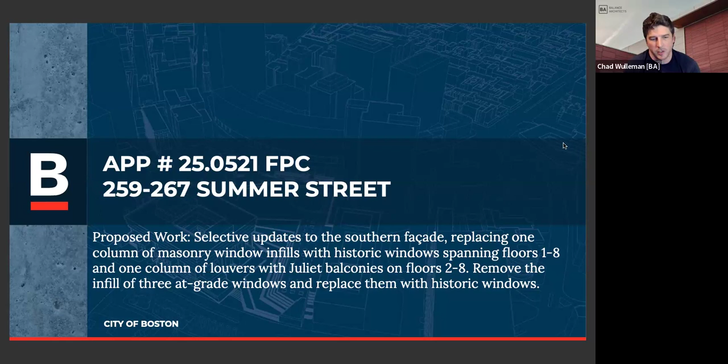Hi, commissioners. Chad Wulleman from Balance Architects. I'm going to run you briefly through the project for 259 to 267 Summer Street. This is part of the new downtown residential conversion incentive program. There's board approval as of December 12th, 2024. We've made a lot of efforts to minimize anything on the exterior of the building, with a few exceptions we'll get into as we go through the slides.

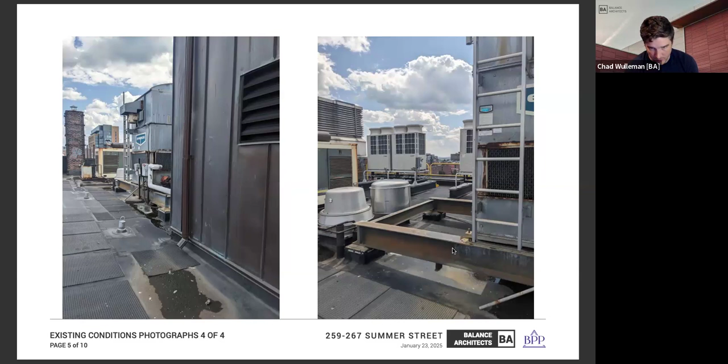Here are some images from the roof. These are important: you've got the existing head house on the right, and some mechanical equipment behind it. The new mechanical equipment will be going in the same place, so again we're trying to minimize any impact there. We've already gone through the process of mock-ups on the roof to ensure those aren't visible.

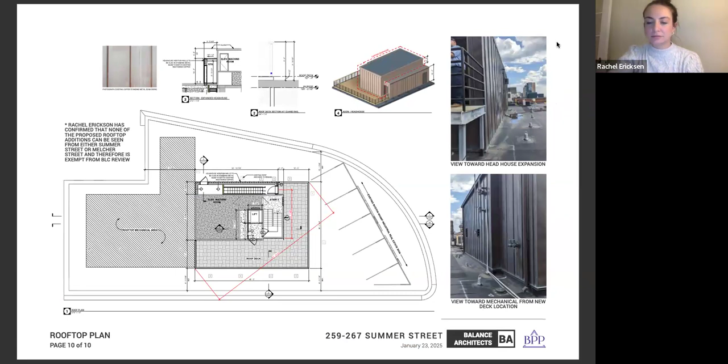David, you're muted. On your roof work here, where you're adding a new deck surface, is that it? Is there going to be a railing? And then I assume Rachel, you looked at that as well? Yes, they mocked up the rail. I could not see the rail at height.

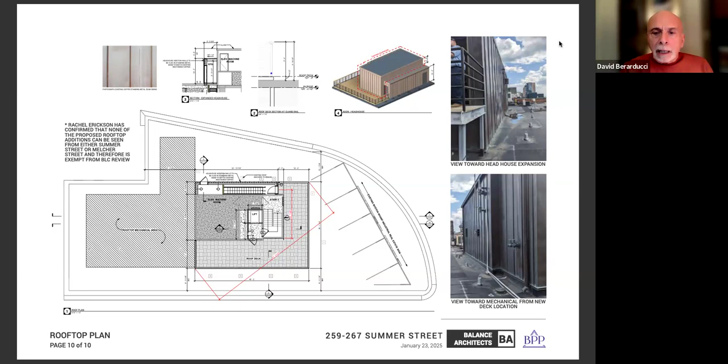All right, so if we can go back then to the beginning, and see your first alterations here. Basically it's a restoration of what was there.

You're not proposing any new openings that were historically not there. The window row to the left that's highlighted there, those are going to be brand new windows. And then what is there now? Were they bricked in, or was it just a solid pane of glass?

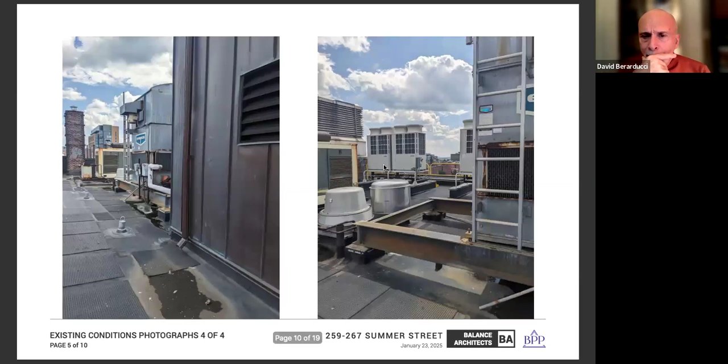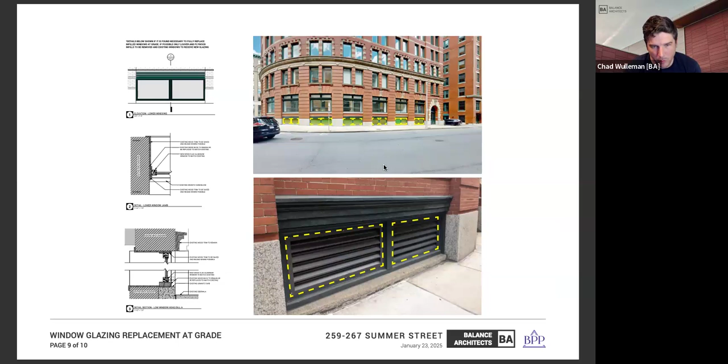So there's a slide that actually shows it here, it's going to be later, I think slide 6 or 7, maybe 8. And I'm wrong again, it's 9. Yeah, here we go, this is that bottom row window. So 3 of them are infilled with louvers like this, and 3 of them have plywood panels that are painted. All right, so I'm talking about that long vertical row of windows.

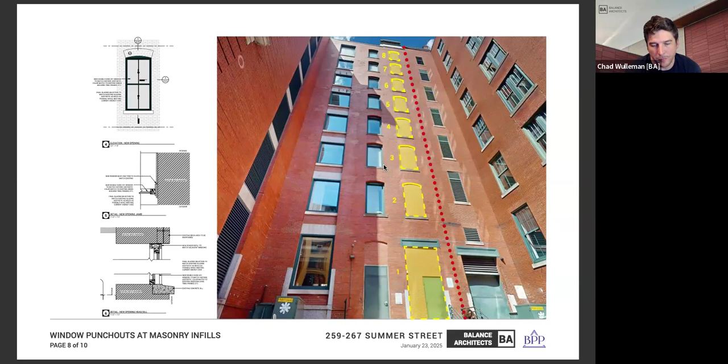Yeah, I apologize. Okay, so this is brick infill now. Yep. But on the other view that I was looking at, was this it? Okay, oh geez, I don't know, I'm getting all disoriented here with the angles. Okay, so this view, I understand where the right-hand segment of the building is, that vertical, and then moving to the left, there's a space, and then that row of windows there.

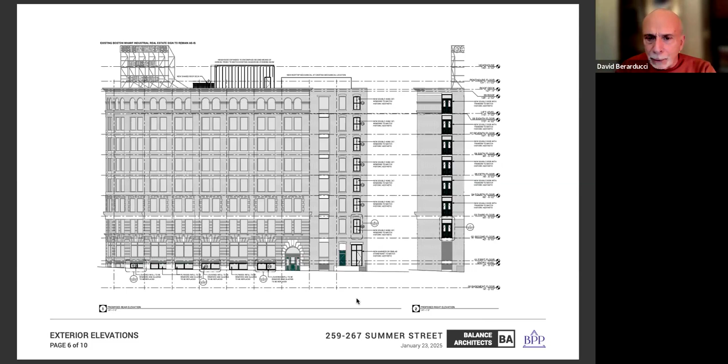Yes, those are going to be new. No, so these are actually these ones. So on the left elevation, the proposed rear elevation, the ones to the far right of that specific elevation are actually the ones filled in with brick and they're being punched out. All right, so that's set back, in other words. Okay, yep, that's where I'm getting a little bit disoriented here.

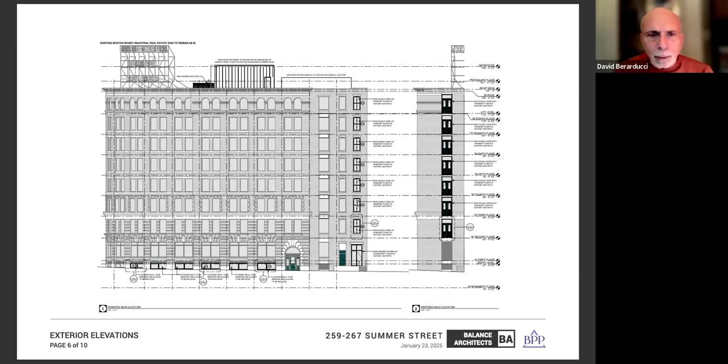Okay, so you're taking the brick out and putting in the 2/2. I assume historically that's what was here, since this building has been stripped of all its original details. Actually the image I have of the existing building is from 1907. I should have touched on it when we showed that image. So on the far right of that image, you can actually see -- oh yeah, I see it, I see it -- two over two. And we also looked at the plans for the building, and they had 2/2 windows in the original plans.

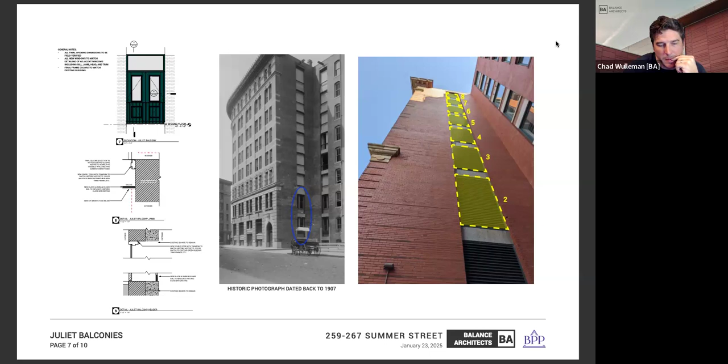All right, let's keep on this slide because I'm going to ask about this. So these windows are going to be metal clad. We're working with Pella right now. These are either going to be metal or wood clad, I believe. All right, yeah, okay, well I guess we would want to know that at some point. So I guess we'll probably ask that detail be remanded to staff, but as a proviso.

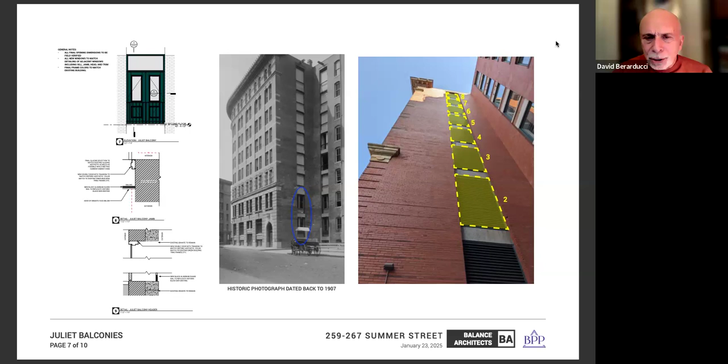Now in this view, what you're showing in yellow is what's shown in the historic photo to the left. So what is there now? In the historic photo, what are those light grayish covers on the opening? This was a hoistway originally, right? Yes, it was, you could see the hoist. You'll see you can actually see it on the right side here too, we have a similar thing happening next to it. As you go up, some of those panels actually open.

Okay, so these were like interior doors that opened in, and they all open in. Yep, that looks like it was just a pipe in the middle to prevent people from falling over, I'm gonna guess. Yeah, it actually looks almost exactly like a Juliet balcony on those first 2 floors. Yeah, right, higher up, it looks like a pipe just across to prevent a fall.

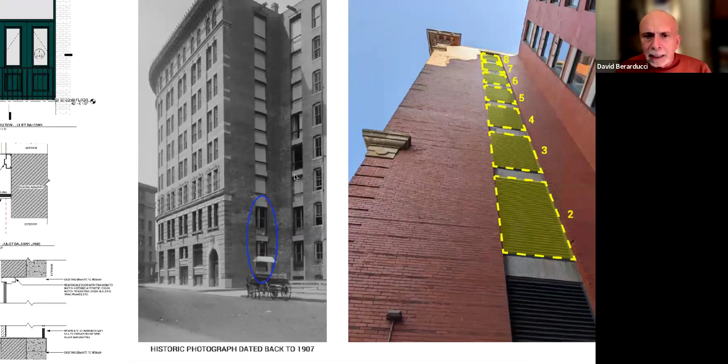All right, so pan to the right there so I can see what you're proposing. You show the one louver at the bottom that does not have a yellow screen over it. The reasoning for that is there's actually existing transformers outside of that area, so that louver will not be in yellow. That is the first floor, over on the left historic photo.

So you're leaving the louvers there and then going up to the second floor. You've got that blue ellipse showing both the first and second floor. So on the second floor, what are you proposing there? You're proposing double doors like you have here on the upper left, with a transom above. Did that historically have a transom? I don't really know, so there's two reasons for this.

One is we're trying to do something similar to what was there historically, but then at the same time we're trying to provide as much light as we can for those units inside.

So is that the top of the transom, is that going to be any taller than the top of the historic door? It shouldn't be. This should actually match. It's a little difficult to tell in the historic image, but basically that louver infill is exactly the height of that door up to that next band of concrete. So we're talking about putting it in the exact same location.

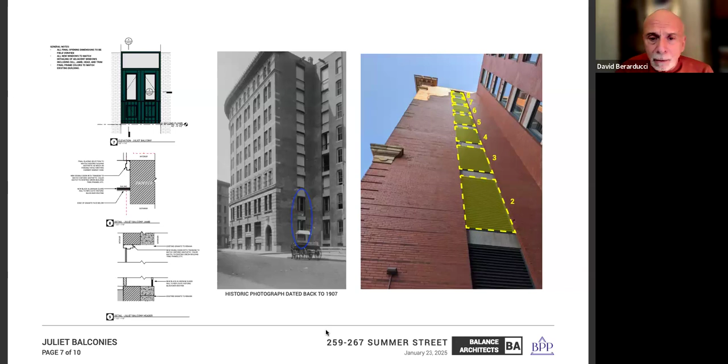Well, I guess I wouldn't look at it necessarily having to see what's nearby, because you've got the historic photo right here that shows you what it was. It wasn't necessarily a door to walk out and be used like a door, it was just... So I don't know why we wouldn't try. Ed, are you reading in that second floor, if you can zoom into the photograph with the blue circle?

Are you reading that as... I see, okay. So what you're depicting here is that there's a ledge, there's a grill, there is some material of opaque surface that is the bottom of that double doors. Is that how you're reading that? Not reading that as a full glazed panel from top to bottom, correct? Correct. It looks like there's a solid panel behind that guardrail there.

In the historic photo, yeah, she zoomed in a little. You can see it pretty good right there. So in the new door that you're going to propose, where is the bottom of your new door in this historic photo? Is it at the top of the grates or...

No, it's at the bottom. It's right at the bottom of the grate, basically at the cursor. This so I could... bottom of this door would have been, yeah.

Chad, I think you should be able to draw. Just, as long as I see your cursor, if you can just point, just because I want to make sure that we're doing this. This is my cursor, David. Oh, it is. Okay, there we go. Chad, can you draw? Okay, so that red, that would be the bottom of your new door. Yep, which is the bottom of the louver, based on the existing floor inside as well.

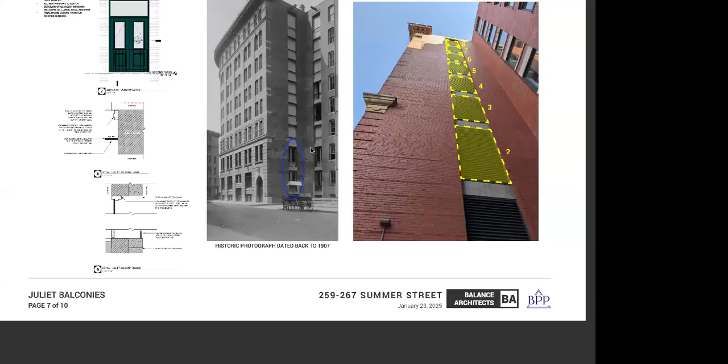Okay, because I don't know if this gets to what you're referring to - if there were just openings, why do we need the Juliet balconies all the way up the length of the building? That's kind of how I'm viewing it right now. If you just put windows in on those floors, the windows would be fine, but there's all the extra grill work and so forth all the way up the building.

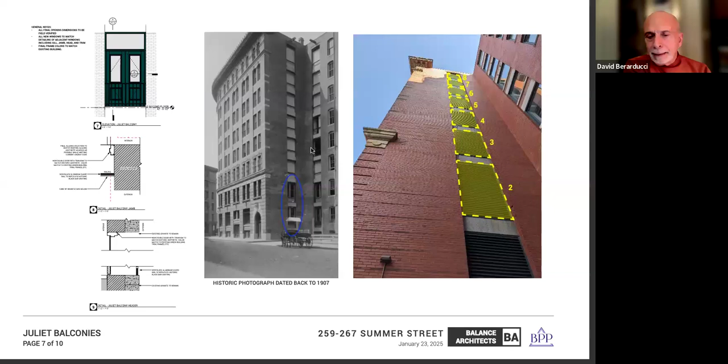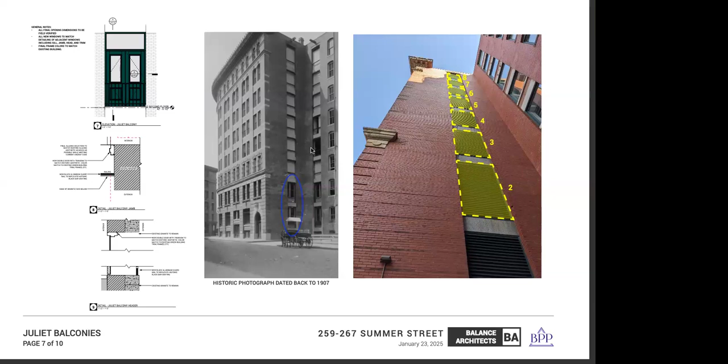I think the reason the grill work is on floors 1 and 2 is to show that the opening is as big, as tall as the openings on floors 3 through 8, but the window that was historically there is shorter than that. So the bottom portion, they wanted to express it, so they just put this grill there, or the metal grating, to block it and make it a little more visually interesting, and keep the same window opening consistent all the way up.

So all I'm getting at is, to me, it seems floors 1 and 2 ought to have windows instead of this door that you're showing, and then floors 3 through 8 - I guess that's the question. You could say, okay, you could put in those double doors, but I don't know that you would want them to open. So you're going to be adding a new feature to the building that was never there - these grates, the railings, I'll call them, from floors 3 through 8 that don't look like they were there historically.

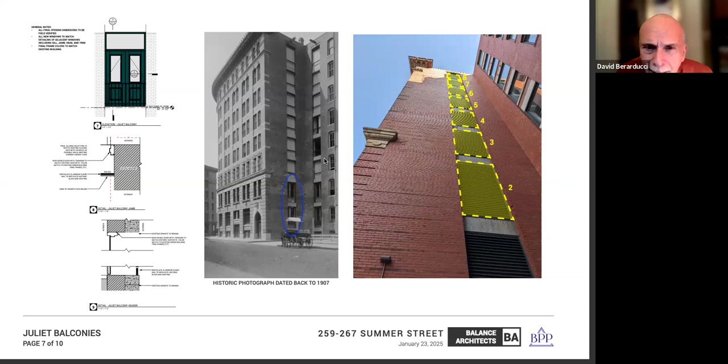As a matter of fact, you can see on the 90 degree turn of that facade, that one hoistway window or opening that is open, and it looks like the doors had been open on the inside. So the whole entire expression of that opening is now visible, with no railing there, just has one hefty bar, which I think was a safety thing back in those days - now of course it wouldn't pass code, but that's the visual I would rather see, rather than have those railings with the four inch on center.

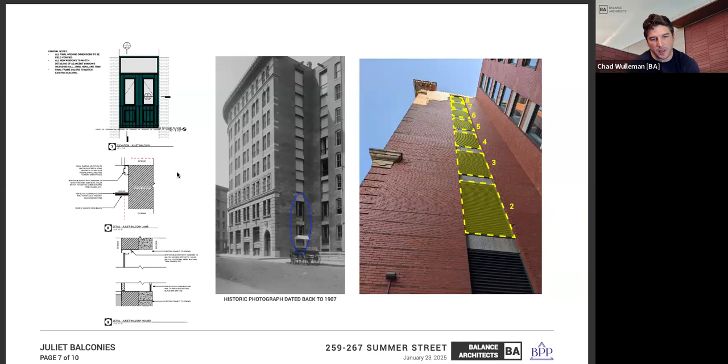But then now what I guess you're getting at is that you want those doors that you're showing to be operable, so you could open them up and have air come through. Is that what - yeah, it's a nice feature to be able to open those doors. I think the thought was, seeing those on the lower floors, that's what they felt like, and it felt like that would fit the aesthetic of what's happening there.

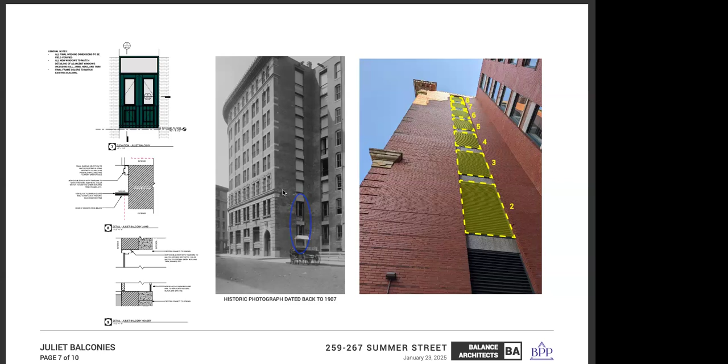Well, I think what Adam's suggesting is there would be some kind of a fill glass beneath that 4-inch diameter bar, to functionally create a Juliet balcony and have some activity in that area, without just slapping a grill on there, to emulate in a passive way the aesthetic that is closer aligned to the historic photo. Is that right, Adam? That's exactly correct, and what I was trying to articulate in not as great a way as you did.

I'll just say my own comment on this: I think that any of these configurations is an improvement from the existing condition today. I'm not sure that's the standard, but I think any activity in this building is going to be very exciting, period. It's great that it's more residential within the context of the neighborhood, and certainly seeing any kind of activation from this view corridor—the existing conditions photo on the right shows grills that are going to be inanimate no matter what. So I think just as a baseline, that's a great place to be operating from.

I do like the restrained, simplistic industrial look that David is pointing to in these upper floors. There's something about the plinth, the base condition of the second floor, that has characteristically a different quality than the upper floors. So the simplification of that, I think, is a good direction to be moving in.

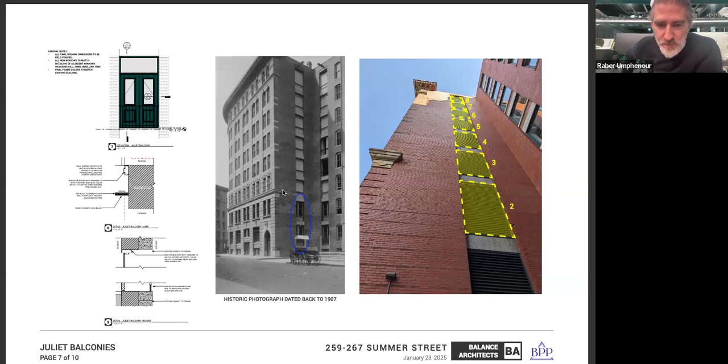As a general idea, I do take your point, Adam, that the bottom two floors are not really going to be an expression—you're going to have a standalone second floor condition because the first floor isn't being touched. Right, yes, that's true. But at least it sets up the possibility that at some other point in time, the first floor can emulate whatever is done on the second floor.

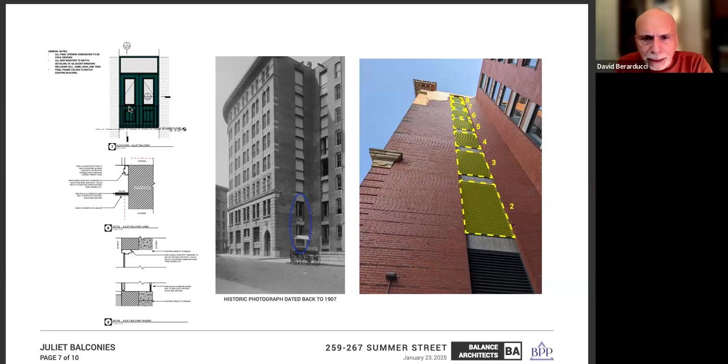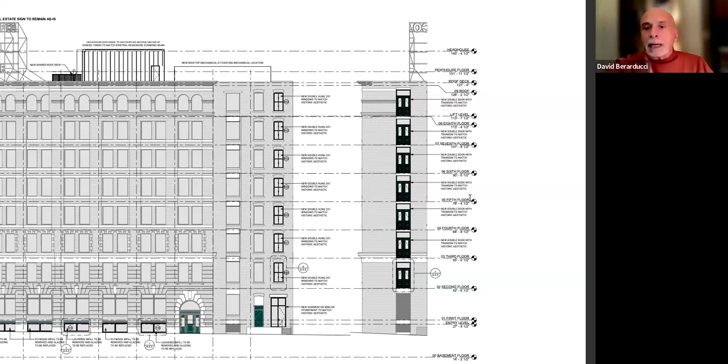It's nice what you're showing here, but it's not historically what was there. You're introducing a transom window, which is now putting a whole series of horizontal expressions all the way up, which wasn't there before, obviously. So I'm just trying to see, is there some way to get closer to what was there in terms of the physical opening, which looked to be a solid door with that big bar separating it at the one-third point of the opening.

I guess those doors, the original doors, were probably not glazed, it looks like. They were solid. Yeah, I think those are solid, some kind of metal or door.

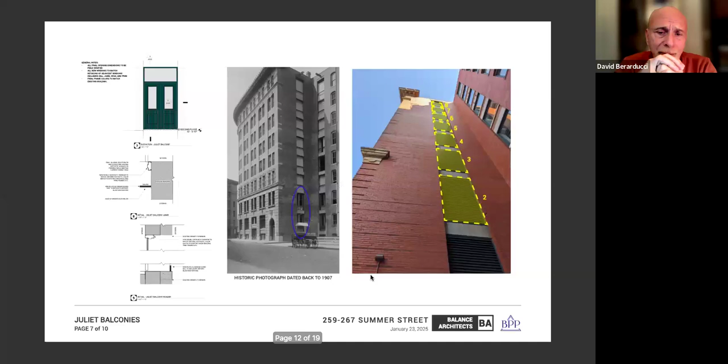So I'm not saying you do that, but I'm just trying to think if there's another thought here. If you were to do a window, first of all, let me back up. The opening we're looking at here on the left side, where the oval is, all the way up.

The opening of the window that you're going to remove and put these new windows in is the width of that opening. That's going to accommodate the two doors. Yeah, it's just under 6 feet, so it's like 5 foot something. So they're not doors you walk through, but you can open the two of them to be roughly around 5 feet. This image is a little deceptive, but alright.

One of the thoughts I had is that if it wasn't a door, if it was glass infill, maybe to get ventilation, where the horizontal bar is on that opening, if that became a sort of pivot point on the new window you're putting in—could that be an awning window that pops out a little bit to get some air? That way you'd keep the same look.

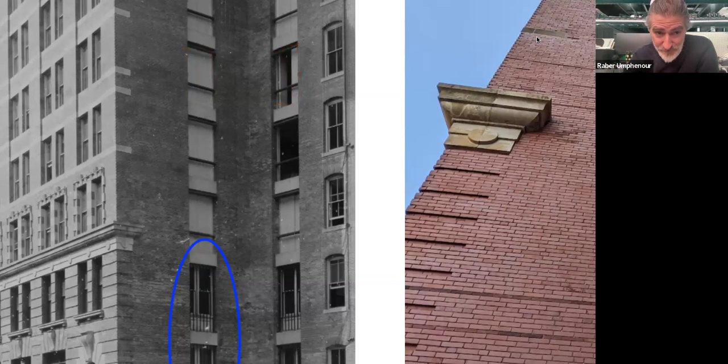There's a lot of apertures in the neighborhood that have this kind of back-filled dousing of light, and those could be full length of the door so that you are able to block all light or open all light inward, similar to these.

So that would be, you're saying, having something that is operable from inside that space, that covers the glass on the inside. That's right, yes. And that would ostensibly, when it's closed, look like this, and it would open in.

So that you have a way of dousing the light, of blocking the light, that is not the introduction of some new apparatus. It's in fact consistent historically with what is depicted here, a kind of industrial quality to it. And then you can still have the bar as your division point for the glass.

This is not an answer for what happens here, whether you carry that condition all the way down or whether you do a one-off in that final quasi-Juliet balcony, I think is something of a jump ball. To me, it almost seems to do a one-off on the second story. Then, maybe on the first story, even though there's louvers there, maybe you can add the grate or the fence piece in front of the louver.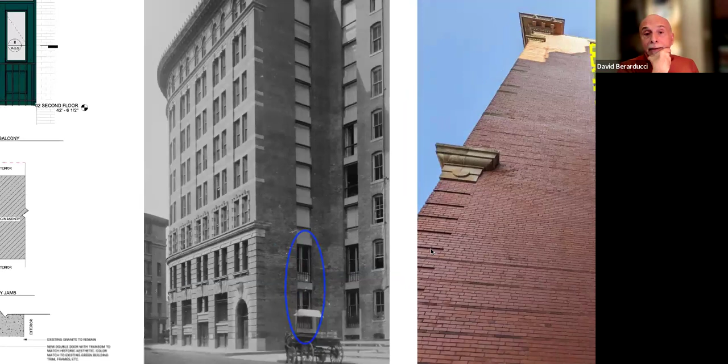So, to me, it seems we've got everything we could want here, right?

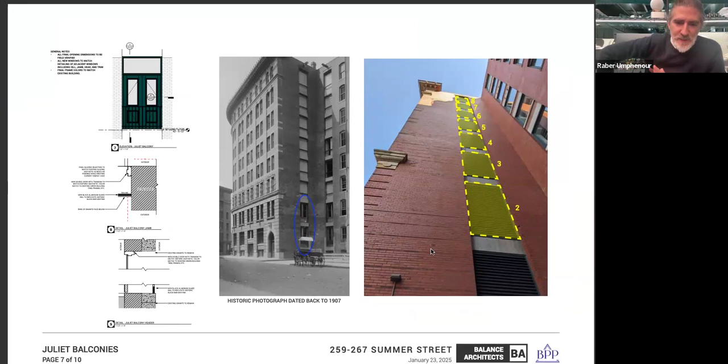I would like to underscore that, and I acknowledge Rachel flagged this at the beginning of the presentation, but the iconic sign at the top of this building is extraordinarily important to the district and the neighborhood.

I don't know to what extent that has been baked into the cooperation agreement and your planning approvals, but this element is very, very important to the district identity, and we know you'll be coming back to discuss that. The detail on how the neon will be managed if you're switching to an LED solution is going to be super important for us to look at, because it has a real charm and elegance to it.

There's no question the sign has to look like it did historically. I know, as a matter of fact, I think the Citgo sign was converted from neon to LED, so that would show how you could still get the design of a neon tube but have it be LED lit. So there's a method, but that's something we don't have to go further with since it's not part of this application.

So let's get back here now. The bottom windows, the very bottom portion, those are going to be fixed. Those aren't going to pivot out or be awning of any kind. I think the intent is those are fixed, yep.

And are they going to be frosted or not? That is not the intent right now. No, I think that's going to be great at the bottom there, to have those return to glass. That'll be great. And that will be down to a basement, is what that will be, Chad?

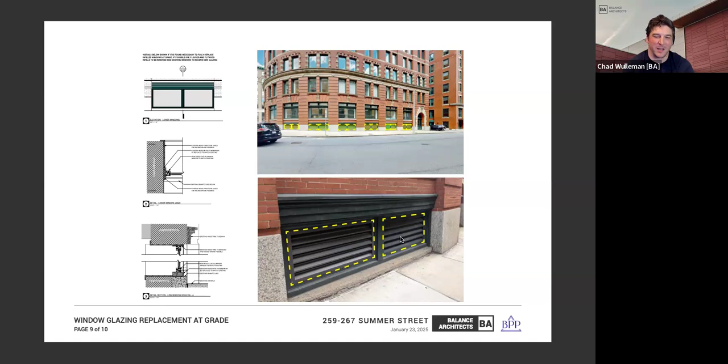Yeah, there's a basement level down there that you can actually see up to, where those windows are infilled, so all that light got taken away on that back side. Got it. I wouldn't want a basement apartment, but that's all right. That will be commercial. Okay.

So before we open it up to the public, are we understanding what the thought process was on these new windows on the side in place of the hoistways? Okay, what I think would be great is to see a rendering that shows that, if that's possible.

Yeah, we have everything modeled in 3D, so we'll revise that window.

And then, like I said, to look at the possibility of since floor number 2 - if you're going to do this grate, I don't want to keep calling it a grate, a railing - that maybe there's a railing put in front of the louver or at the bottom at the first floor too. But again, I'm not going to say that's crucial.

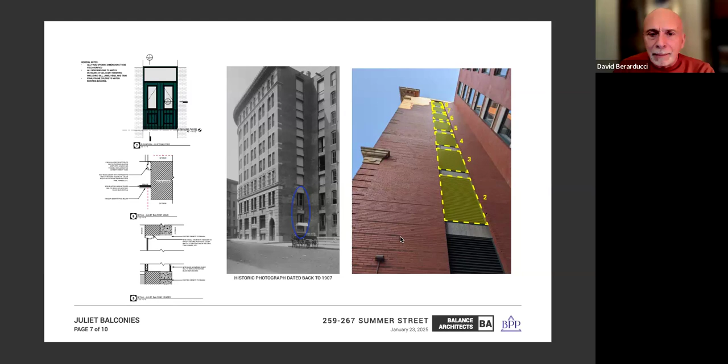I want to get back to this. I like the thought though. It's possible, it could help share that, making a pair of windows with that detail versus the others. But if we could zoom in again to the historic photo and see the corner of these windows, keep going further. Okay, right there. There we go. I think those first two floors had grates all the way up.

You could see them. I do see them now. I don't think that was a separate railing at all there. And you can see, especially on the second floor, that goes all the way up. And wasn't there a bank in this building at one time? I thought there was a bank in the building at one point.

So anyway, I'm just saying that's the detail that was there. I'm not saying that's what you should do, I'm just throwing it out there. I feel like you guys are getting to a point where maybe you could consider continuing this portion of the windows, or maybe continuing an application and having them come back in February for this. Yeah, it needs to be studied a little bit more.

So let's open it up to the public and see what we've got there for feedback.